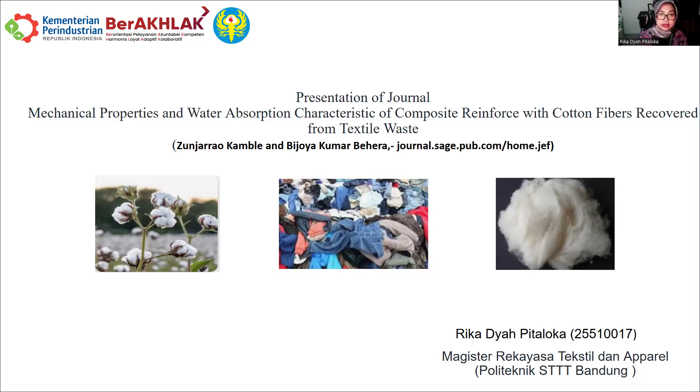So yes, let's start with the first slide.

This research was conducted in India. India is the largest country that produces cotton, so a huge quantity of cotton fiber is available there.

Cotton fiber reinforced composites are categorized as green, meaning cotton is a biodegradable component. The research reports the application of cotton fiber extracted from textile waste, generated into the textile industry for development of thermoset epoxy composites.

This is why there is growing interest in using textile waste to create reinforced composites, especially using waste cotton fibers, gaining attention for environmental and material efficiency concerns.

There is also a fact about cotton usage trends: cotton held a global volume share of around 31% in 2015, and 25.4% in 2016, with rising demand contributing to increased textile waste.

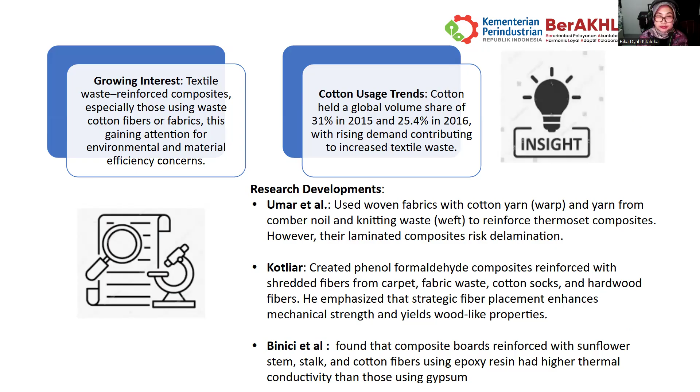In this slide, we're talking about the objective of the research. The objective is to investigate the potential of recycled cotton fiber taken from textile waste as a reinforcement material, considered environmentally friendly, for thermoset composite. The aim is that this composite product is suitable for applications in the furniture and automotive industries.

We have the materials and methods here. First, as explained in the previous slide, the cotton fiber is recovered from textile waste and then processed into shoddy, making them into shoddy web using rag tearing and carding techniques. Then the composites were fabricated via compression molding with varying fiber volume fraction, starting from 0.1 up to 0.4. Lastly, we quantify and analyze the mechanical properties, thermal properties, and water absorption.

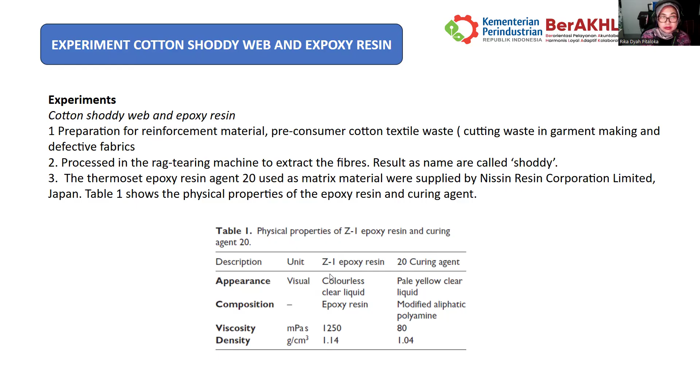Next we will see the preparation of the carded web and the development of the composite. The key insight is that the carding speed significantly influences fiber orientation, which directly affects the mechanical properties of the composite in specific directions.

The experimental setup is as follows: they take the cotton shoddy from the processing roller at the carding machine with a variety of cylinder speeds. They made groups of cylinder speed starting from 100, 150, 200, and 250 rotary per minute.

The machine working width is 30 inches. The resulting fiber web is wound into a wooden roller to form a multi-layer web, which aids in the composite development.

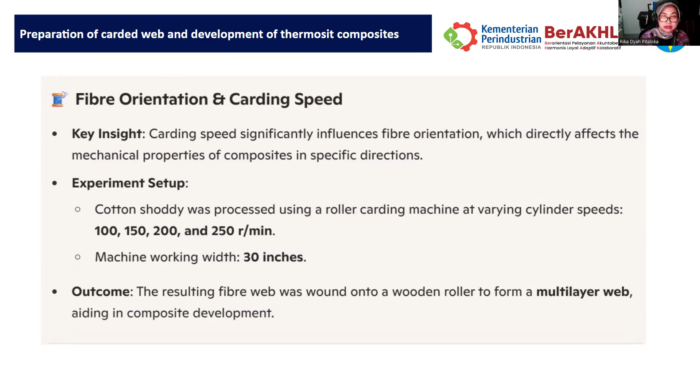Now we are going to explore more on the composite development processing using cotton shoddy web. On the left side, we see the detail on composite formation, optimization, and the final composite spec. Cotton shoddy were selected with a specific dimension and fiber volume fraction.

After that, the epoxy resin and curing agent are mixed with a weight ratio of 100 to 25, and then degassed to remove air bubbles. In composite formation, the fiber web is placed in the molds and carefully wetted with the resin. Compression molding is the technique used to form the composite specimen.

In the optimization and testing, the web process uses various carding speeds, which are converted to the thermoset composite. Tensile tests are also conducted to identify the optimal carding speed.

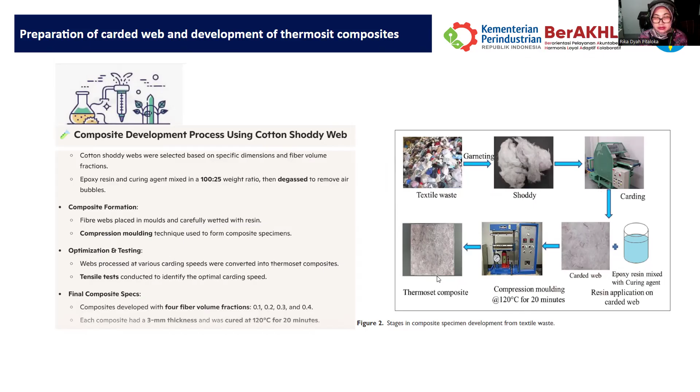So from this journal and also from the research, the scientists found three key findings.

First, the mechanical properties, including the tensile and flexural strength. These properties improve as the fiber volume fraction increases, reaching optimal performance at specific fiber contents. The mechanical properties are also comparable to wood, indicating suitability for structural applications.

There is also dynamic mechanical analysis, which shows an increase in storage modulus and a decrease in damping factor with higher fiber contents, indicating enhanced stiffness and elasticity.

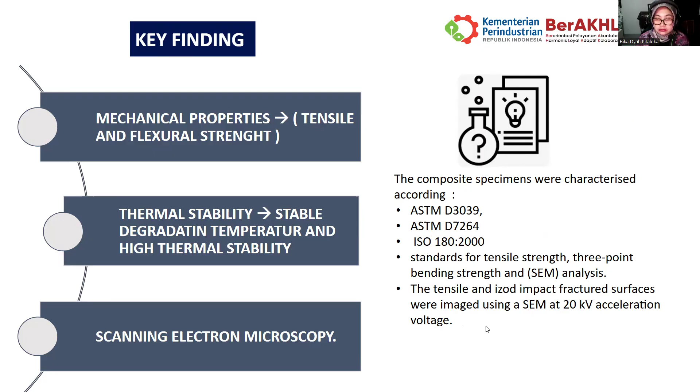Now we review the table of composites developed with four fiber volumes. Column 1 is the fiber volume fraction, column 2 is the Young's modulus, column 3 is the maximum tensile stress, column 4 is the breaking elongation percentage, column 5 is the maximum flexural stress, and column 6 is the impact strength.

In table 2, we see the increment of fiber volume fraction from 0.1 to 0.4. The maximum flexural stress increases from 46.42 at fiber volume fraction 0.1, to 64.10 at 0.2, to 83.58 at 0.3, and further increases at fiber volume fraction 0.4.

So with this data, the increase of fiber volume fraction results in higher maximum flexural stress. This is attributed to the increased fiber-matrix interface area as fiber volume fraction increases, resulting in higher load transfer from matrix to fiber.

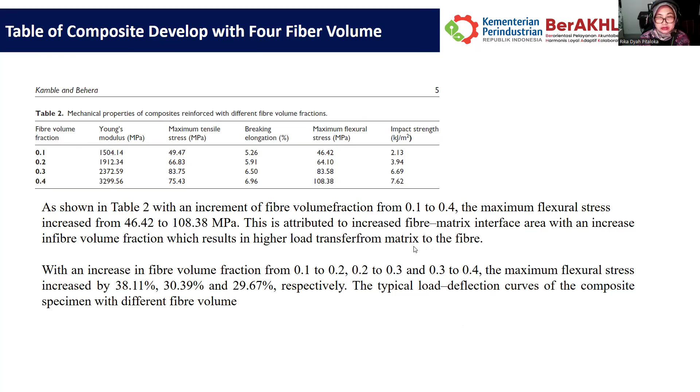Now we go into the determination of water uptake and water diffusion coefficient. In recap, this is about the water absorption test summary.

The standard used is ASTM D570. The guideline shows the procedure of how the specimen is weighed before immersion in distilled water at room temperature. Every 24 hours, the specimen is removed, wiped, and reweighed within 30 seconds to minimize evaporation error. This process is repeated until the specimen reaches saturation.

Here's the calculation for the water uptake, or WC, where Wt is the weight at time, and W0 is the initial weight.

Another point is about the diffusion coefficient. With this formula, Mt is the water content at time, M infinity is the equilibrium water content, and L is the sample thickness.

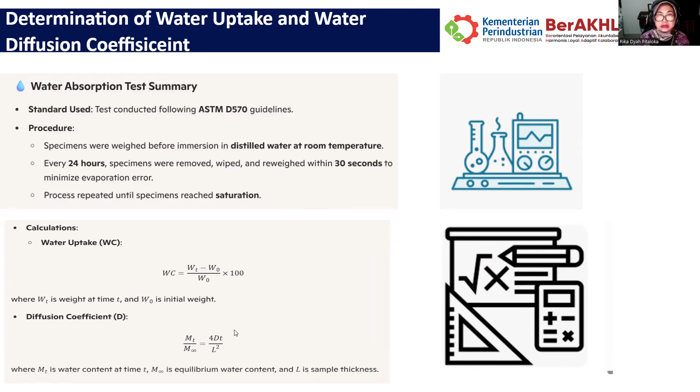Okay, so now we come to the slide of results and discussion. This is the discussion on the effect of carding speed on the tensile strength of the composite.

In figure 3, we can see the effect of cylinder speed on the maximum tensile stress of the composite. The machine direction shows that the tensile stress remains relatively stable across speeds, meaning whatever speed is used, the result remains stable on average.

Here are the numbers to make this clearer: the tensile stress is 65.19, then 65.2, then 65.75, and 65.25.

From the cross machine direction, the tensile stress increases with speed: 40.69, 42.14, 44.63, and 46.14 MPa. With all this checking data, the scientists concluded that the best selected cylinder speed was 200, chosen as the optimal cylinder speed for further study.

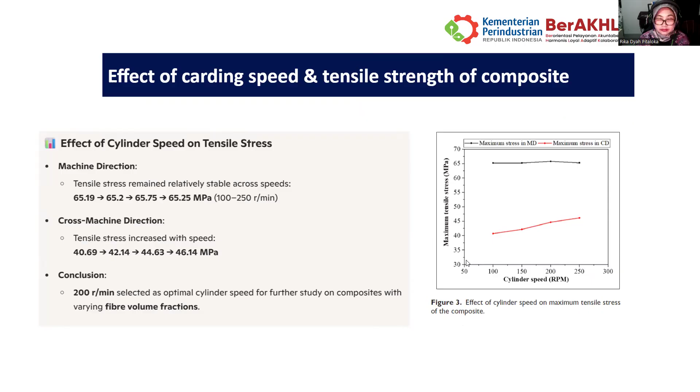Now we also discuss the effect of fiber volume fraction on the tensile, flexural, and Izod impact strength of the composite.

For the tensile strength and Young's modulus, the tensile strength starts at 49.47 for fiber volume fraction 0.1, and on 0.2 volume, the maximum tensile is 66.83.

On fiber volume fraction 0.3, the maximum tensile stress reaches values up to 83.75, though another reading for 0.4 shows 75.43, indicating a gap in the results across the range from 0.1 to 0.4.

So the team mentioned that the Young's modulus would steadily increase from 1.54 to 2.4 to 3.3 GPa.

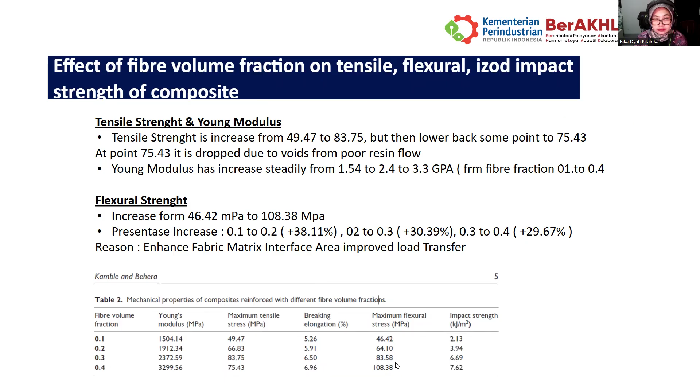This is the discussion on how elongation connects with the load. Figure 4 indicates an increase in the breaking elongation of the composite with an increase in the fiber volume fraction. So this aligns with the load and elongation — the more load you add, the more the elongation percentage increases.

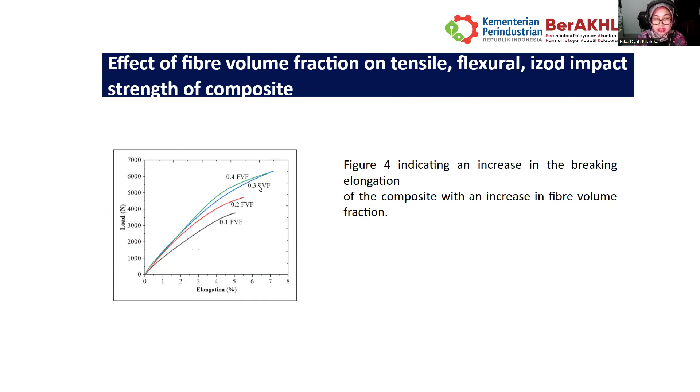Now we come to the overview of the image after the process of applying epoxy resin and tearing the rags from the waste of the garment or textile into a shoddy.

This is the scanning electron image showing the tensile fracture specimen. Point A shows poor bonding, and there is fiber pull out and fiber matrix debonding.

So the composite fails due to fiber breakage, fiber matrix debonding, and fiber pull out, as shown in picture 5A and 5B. The probable reason for the fiber pull out and fiber matrix debonding is the weak interface between the fiber and the matrix.

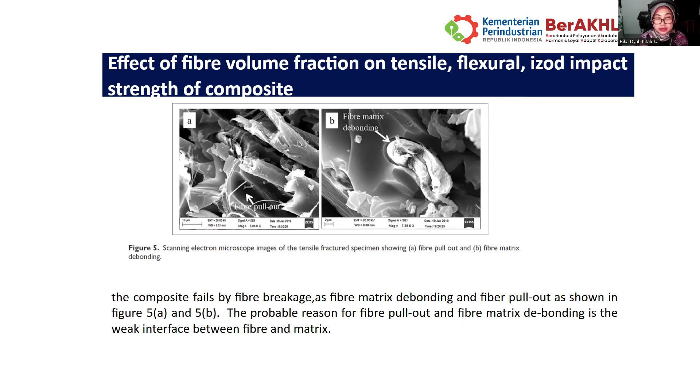This is figure 7, showing the scanning electron microscope image of the Izod impact fracture specimen.

As shown in figure 7, the composite failure due to the Izod impact test was mainly due to fiber breakage and fiber pull out. The fibers which are parallel to the direction of the applied force are pulled out since they didn't take any part in the load bearing.

So the mechanical properties of the developed composite are comparable with commercial wood.

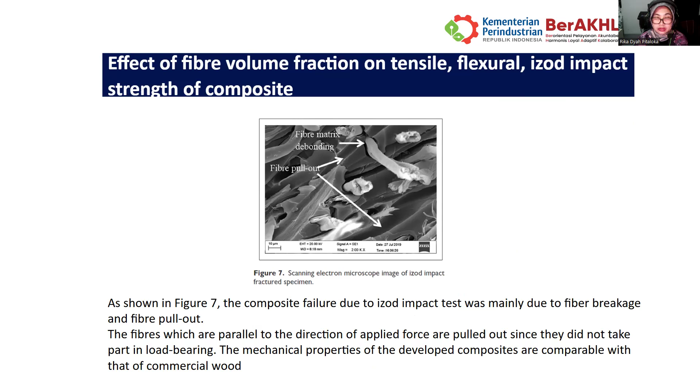Dynamic mechanical analysis of the composite compared with different fiber volume fractions. In table/figure 8, we can see the storage modulus in picture A, and the tan delta plot of the composite with different fiber volume fractions in picture B.

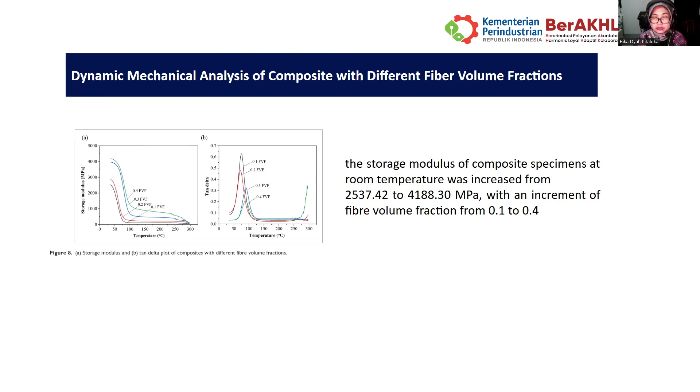In recap, the storage modulus of the composite specimen at room temperature increased from 2,537.42 to 4,188.30 MPa. This shows and relates to the increment of the fiber volume fraction from 0.1 to 0.4.

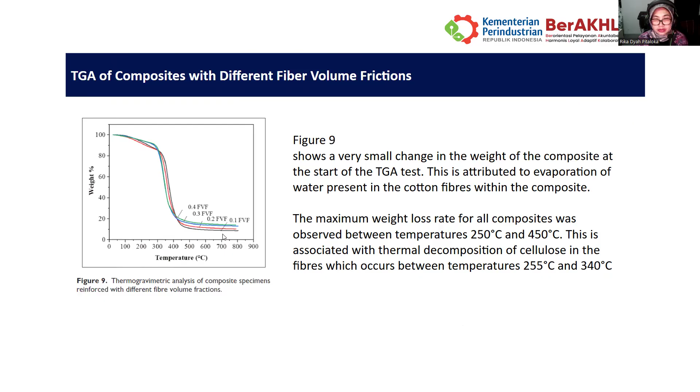As shown in the figure, the maximum weight loss for all composites was observed between 250 and 450 degrees Celsius. This is associated with the thermal decomposition of the cellulose in the fiber, which occurs between 255 and 340 degrees — here you can see the thermal decomposition of the cellulose.

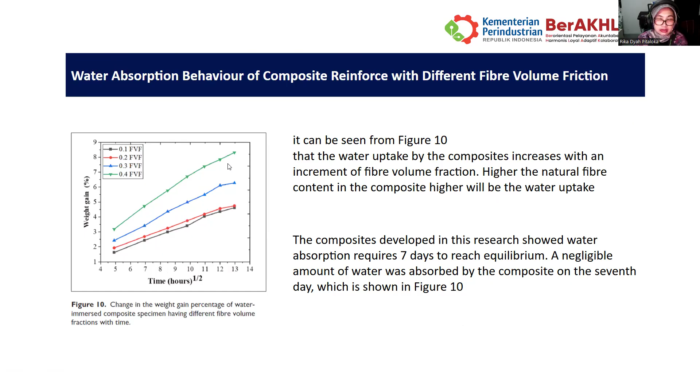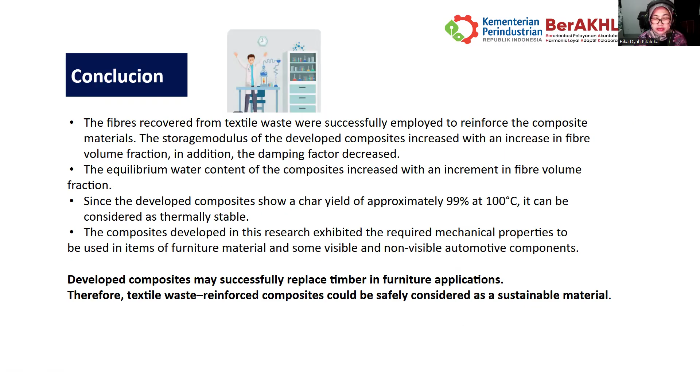So the developed composite may be successfully replace timber in furniture applications. Therefore, the textile waste reinforced composite could be safely considered a sustainable material.